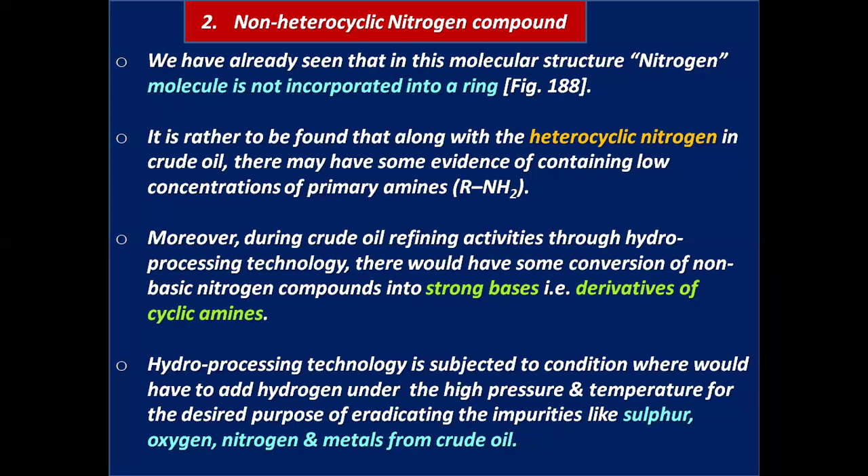Hydroprocessing technology is applied where the oil is first heated in a furnace and then combined with hydrogen, passing through a reactor loaded with a suitable metal oxide catalyst such as cobalt and molybdenum oxides or alumina. This process, also termed hydrocracking, is the most usual practice of removing many contaminants as follows.

First, through the hydrogenation reaction, two hydrogen atoms combine with sulfur, forming hydrogen sulfide, that is H2S.

Second, nitrogen compounds are converted to ammonia, NH3. Number 3, organic or inorganic metals contained in oil are deposited on the catalytic bed.

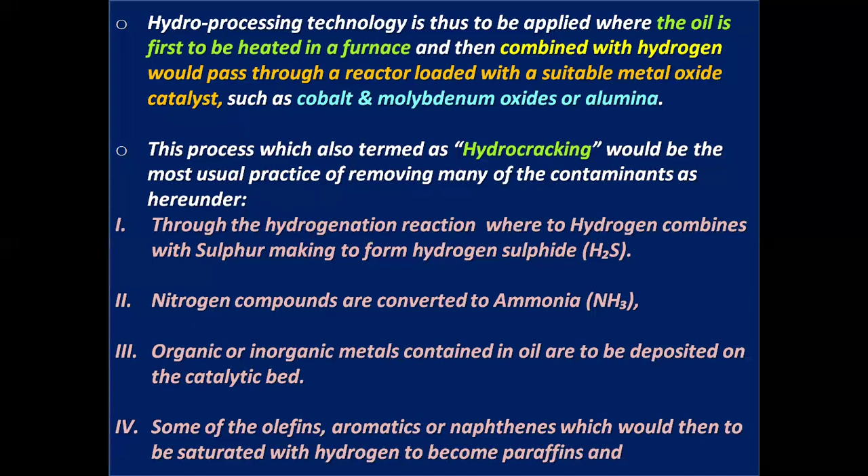Number 4, some of the olefins, aromatics or naphthenes would then be saturated with hydrogen to become paraffins. And

number 5, thermal and catalytic cracking of crude oil would also take place under controlled high pressure and temperature, by which heavy hydrocarbon molecules are broken up into lighter molecules, creating gases such as methane CH4, ethane C2H6, propane C3H8, propylene C3H6, butane C4H10, and butylene or butene C4H8.

If the sulfur content is found to be high, then for maximum removal of sulfur, it requires carrying out the process with higher temperatures and pressures.

Indeed, it can be concluded that the most serious contaminants in crude oil would be the basic nitrogen compounds. Crude oils, as extracted from under the ground or under the oceans, are really of little use in their raw state, but their actual value lies in the products created from them.

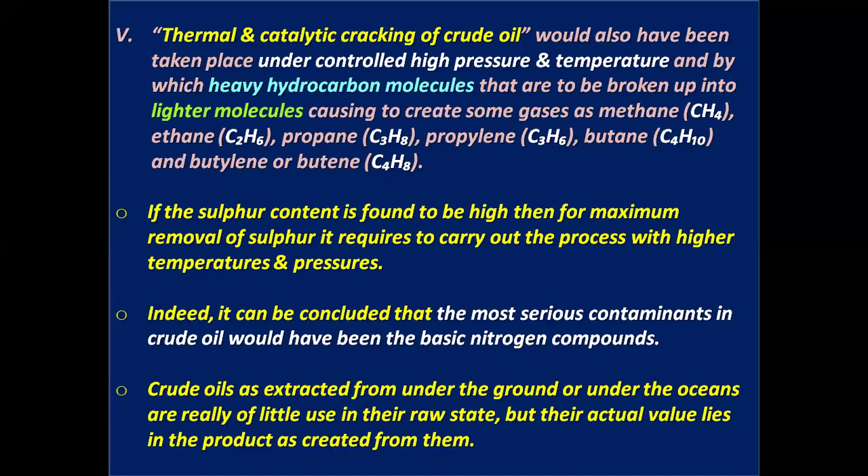It is also worth mentioning that the composition as well as content of impurities in crude oil would vary from oil field to oil field.

In the refinery, an organized and coordinated arrangement of manufacturing processes is designed to produce physical and chemical changes in crude oil to convert it into useful products like transformer oil, lubricating oil, fuel oil, bitumen, etc.

There is rather a recommendation that crude oils containing nitrogen compounds greater than 0.25 weight percentage must need to have a nitrogen removal treatment in refineries. If it is greater than 0.25 weight percentage, then it must need to have a nitrogen removal treatment in refineries.

In ASTM D5762 standard, analytical techniques are provided for the detection and determination of organically bound nitrogen compounds present in crude oil fractions.

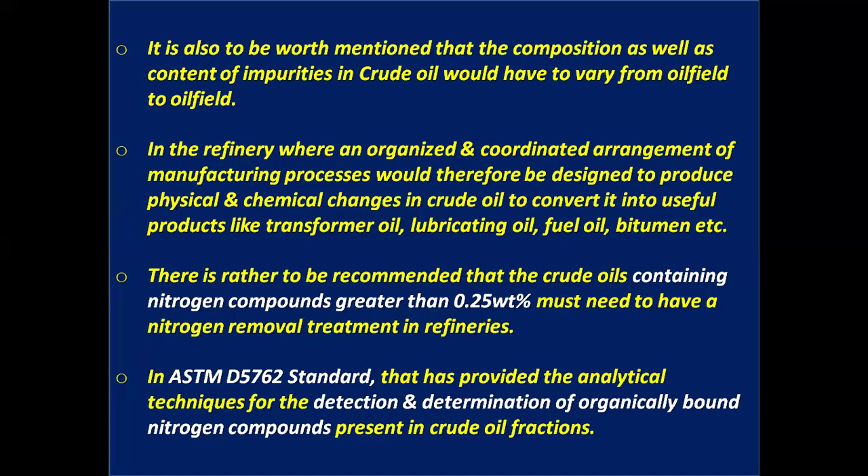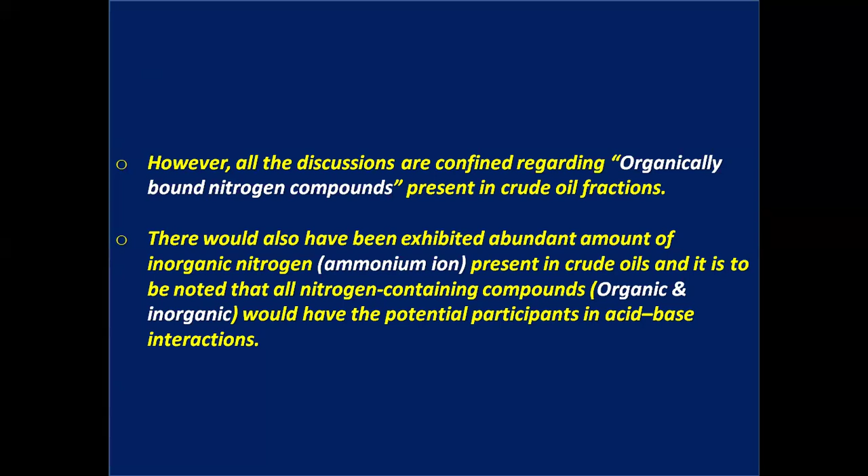However, all the discussions are confined regarding organically bound nitrogen compounds present in crude oil fractions. There is also an abundant amount of inorganic nitrogen ammonium ion present in crude oils, and it is to be noted that all nitrogen containing compounds, organic and inorganic, have the potential to participate in acid-base interactions.

Total acid number, that is TAN value. The acidity of crude oils can be distinguished by their respective acid number or TAN value. A measurement of acidity or TAN value is one of the most indicative quality measurements of crude oil, which can be determined by the amount of potassium hydroxide, KOH, in milligrams that is needed to neutralize total acids in 1 gram of oil.

To meet the gap between extensive demand and consumption, there is a present trend of exploring and utilizing heavy as well as inferior types of crude oil, that is, high acidic crude oil.

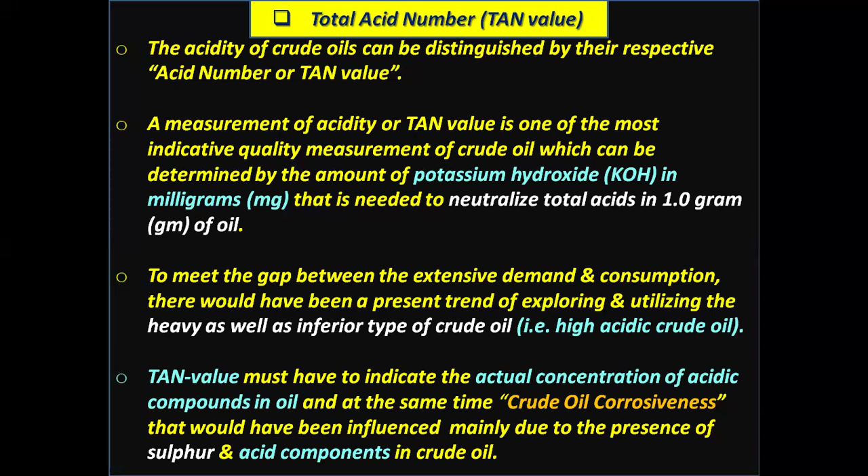TAN value indicates the actual concentration of acidic compounds in oil, and at the same time crude oil corrosiveness is influenced mainly due to the presence of sulfur and acid components in crude oil. The quality of crude oils is therefore better judged by their elevated sulfur content and quantum of acidity.

Acidity in crude oil can be classified by the underneath TAN value. TAN value less than 0.5 milligram KOH per gram is considered conventional crude oil. From 0.5 to 1 milligram KOH per gram is considered acidic crude oil, and greater than 1 milligram KOH per gram is considered high acidity crude oil.

Usually, high acidity crude oil has the following characteristics: high acid value, lesser content of light components, high density and viscosity, high gel asphalt content, high salts and heavy metals content, and highly corrosive in nature.

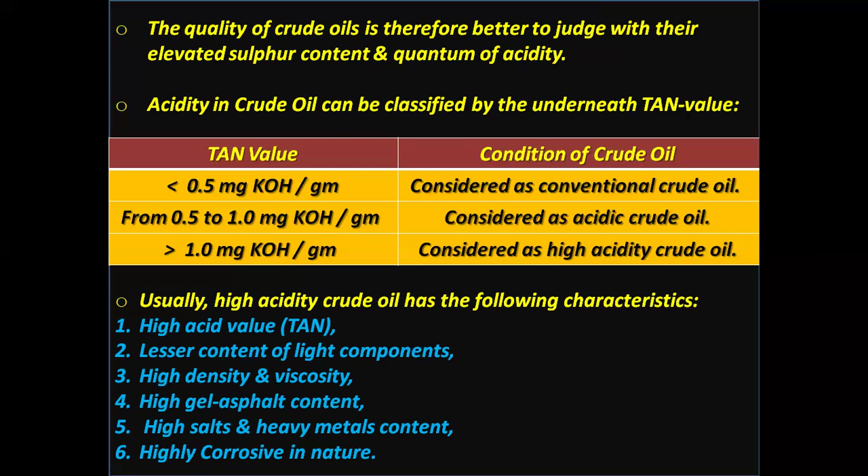The acidic components in crude oil, including naphthenic acid, fatty acid, aromatic acid, phenol, thiol, etc., are usually called petroleum acids. Though the content of petroleum acids in crude oil may be significantly low in percentage weight, these acids may still induce serious corrosive effects.

Naphthenic acids occur naturally in crude oils, and their presence among petroleum acids is usually of the order of more than 85%.

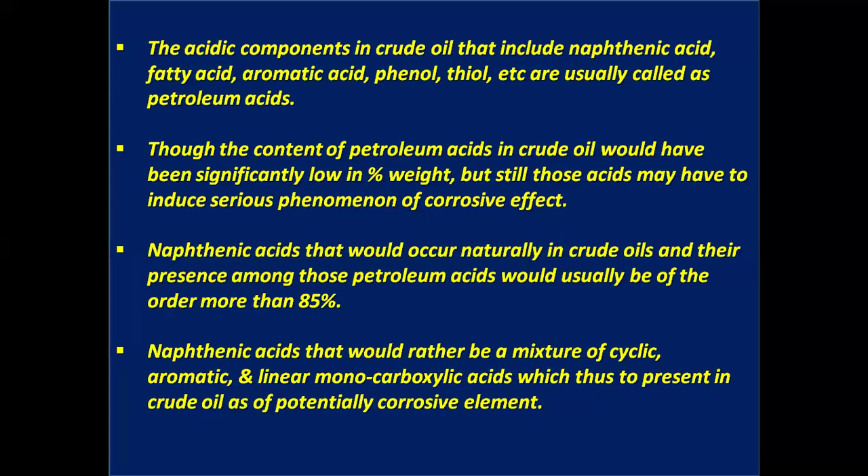Naphthenic acids are rather a mixture of cyclic, aromatic and linear monocarboxylic acids, which thus present in crude oil as a potentially corrosive element.

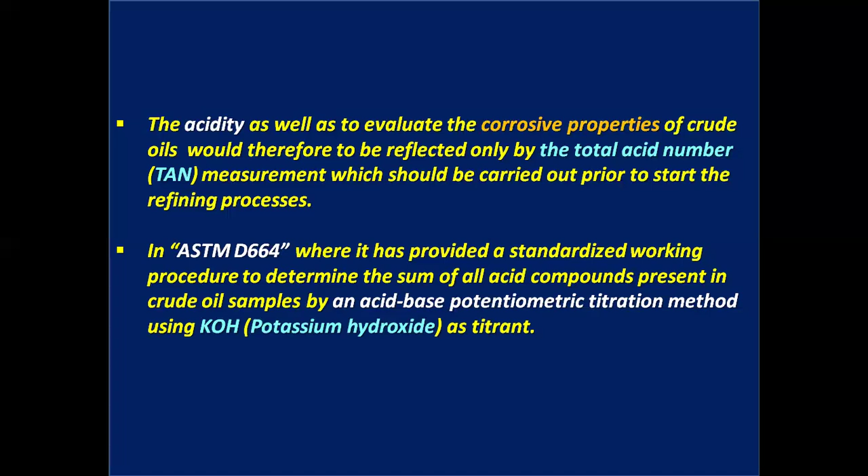The acidity as well as the corrosive properties of crude oil should therefore be reflected only by the total acid number measurement, which should be carried out prior to starting the refining processes. ASTM D664 provides a standardized working procedure to determine the sum of all acid compounds present in crude oil samples by an acid-base potentiometric titration method using KOH, that is potassium hydroxide, as titrant.

Key parameters to evaluate quality of transformer oil: selection of transformer oil is to be determined based on the special characteristics of insulation for transformer as well as to fulfill the additional task of heat transfer and cooling.

So, the oil must have properties which include high voltage dielectric strength, high dielectric constant, low power factor, high chemical stability, low viscosity, low pour point, low volatility, high thermal conductivity, and aniline point.

Oil must always offer neutral behavior with all sorts of insulating materials as well as internal system components. The high performing transformer oil must be non-corrosive in nature with very low sulfur level.

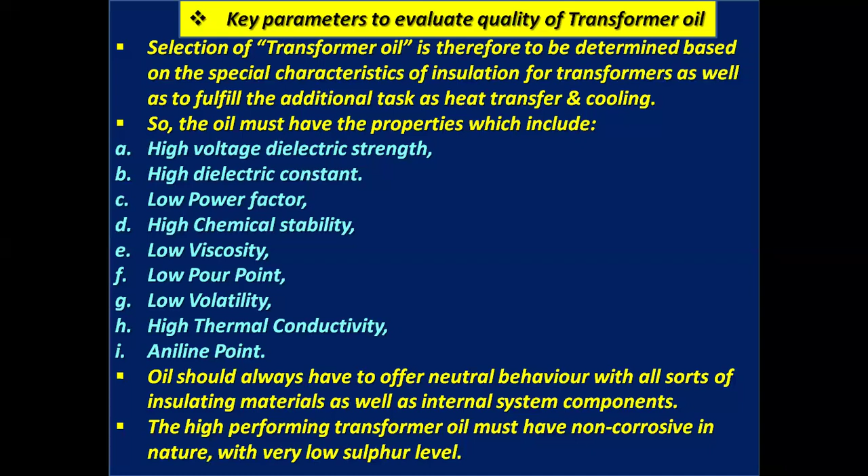Presence of significant level of corrosive sulfur compounds in the oil may lead to reactions with system components such as transformer coils, that is copper, causing electrical and thermal damage.

Exhibiting the complexity and extent of the problem, it has been recommended that transformer oil should satisfy the oil or copper interaction tests as prescribed in ASTM D1275B.

Viscosity is one of the most important qualities of liquid oil, which plays an essential role in referring to the oil's resistance to flow. It is important to understand that the lower the viscosity, the higher the circulation speed of the oil, which equates to a higher quantity of heat being dissipated.

Standards IEC 60296 and ASTM D3487 have precisely recommended an upper limit for viscosity of insulating oils, which is 12 millimeters square per second at 40 degrees centigrade.

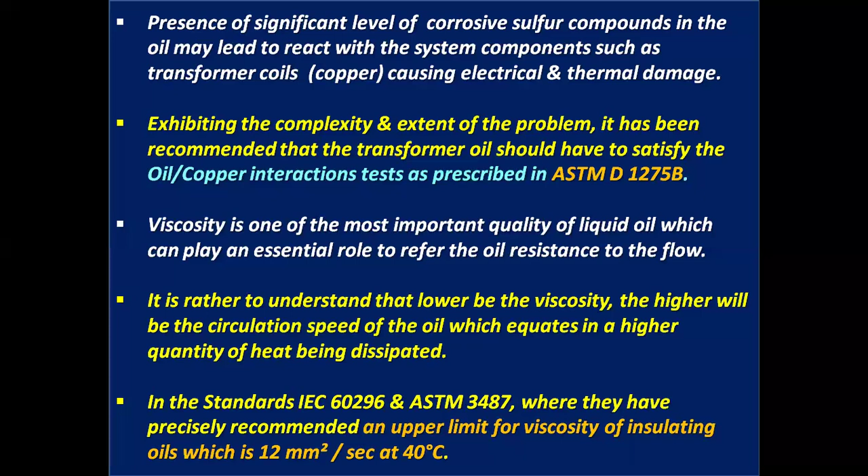Flash point is one of the most important criteria for selection of transformer oil, as it indicates the lowest temperature at which a liquid gives off vapor to form an ignitable mixture in air near the surface of the liquid. Therefore, the liquid flash point is the lowest temperature that can cause a fire. So, the lower the flash point, the greater the risk of fire.

For good mineral based transformer oil, the flash point should be as high as 140 degrees centigrade. However, the flash point of a flammable liquid would also vary with its concentration. There is an exponential relationship between temperature, concentration and viscosity of the liquid oil.

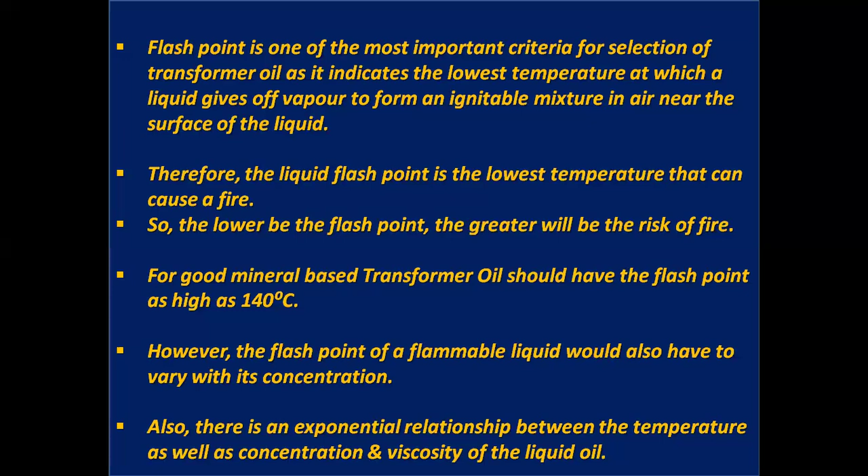Viscosity of high performing unused transformer oils is normally in the range of 7 to 8 millimeters square per second at 40 degrees centigrade. And according to the standards, even with such low viscosity, their flash point must never be lower than 135 degrees centigrade.

The mode of application as well as environmental conditions are both vital deciding factors to select the type of transformer oil to be used, whether naphthenic based or paraffinic based transformer oil.

Paraffinic based transformer oil, whose pour point is comparatively higher, is still the most preferred choice to use in hot environmental conditions, as it is cheaper than naphthenic based oil.

Naphthenic based transformer oil, being more or less wax free, has a good flowing feature under low temperature in cold climatic conditions.

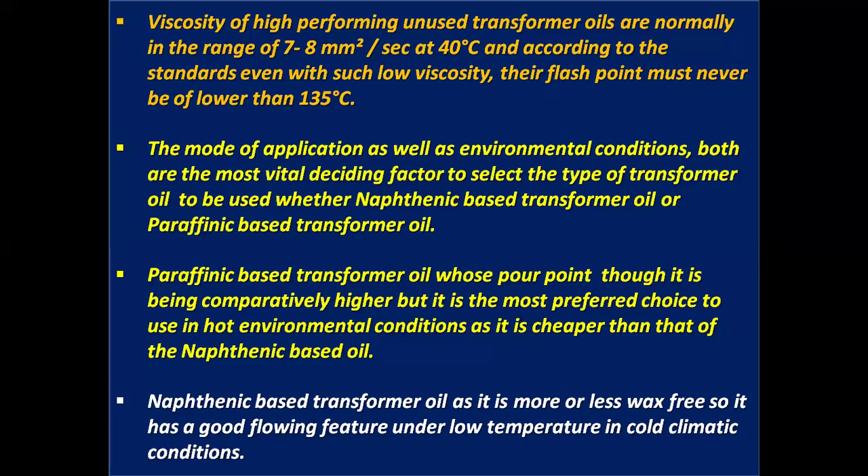Solvency refers to the ability or potentiality of a base oil to dissolve another chemical species at the molecular level, which may be an additive component or a contaminant such as water or an oxidative product, that is, sludge, as produced.

The aniline point is most often used for characterization of hydrocarbon based oils by estimating the percentage rate of solvency of aromatic hydrocarbon content in the base oil. That is why aniline point is most important.

ASTM D611-2023 provides the standard test method for quantifying base oil solvency as well as measuring the aniline point and mixed aniline point of petroleum products and hydrocarbon solvents.

It is quite evident that aromatic hydrocarbons exhibit the lowest values of aniline point, whereas paraffin based oils have the highest value.

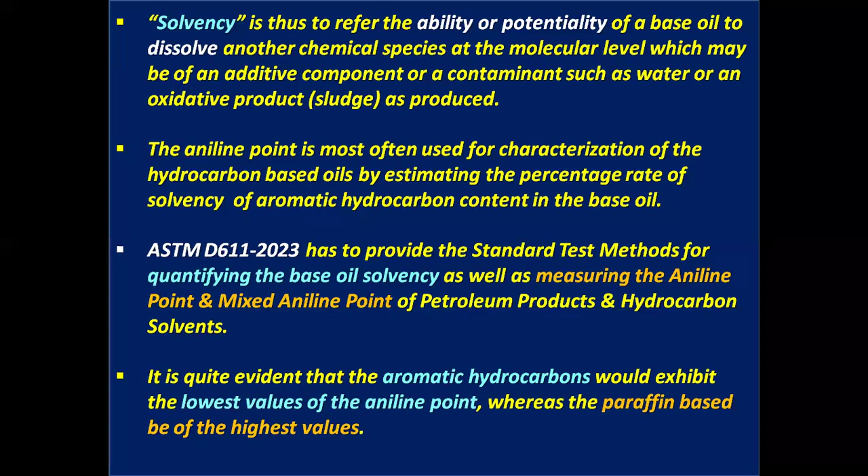The oxidation rate is another important parameter to consider during the selection of transformer oil. Naphthenic based transformer oil is easier to oxidize, and its oxidation rate is much higher than that of paraffinic based oil.

But as the aniline point of naphthenic based transformer oil is much lower than that of paraffinic based oil, the naphthenic based oil has the property of high solvency.

Basic importance of determining the aniline point of oil. Aniline point, or aniline point temperature, can be referred to as the minimum temperature at which the solubility of aniline in oil, or oil in aniline, reaches 50 volume percentage. In other words, it can be expressed as the lowest temperature at which equal volumes of aniline and oil are completely in a miscible state.

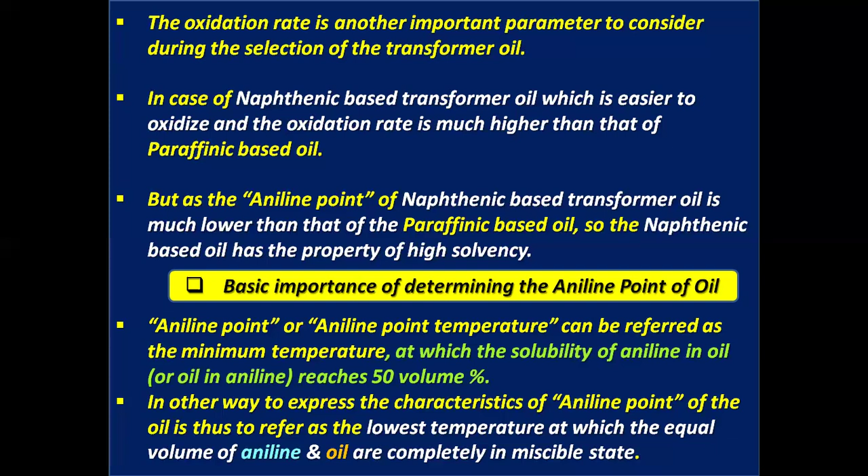Aniline is an aromatic compound with the formula C6H5NH2. Aniline point of an oil would indicate a rough estimation of the relative content of aromatic compounds present in the oil.

From the analysis, it has been concluded that the oil with higher aromatic content would have a lower aniline point, and vice versa.

Aniline point is also to be justified as a measure of oil solubility, where the lower the aniline point of an oil, the higher its solubility criteria relative to aromatic compounds, and vice versa.

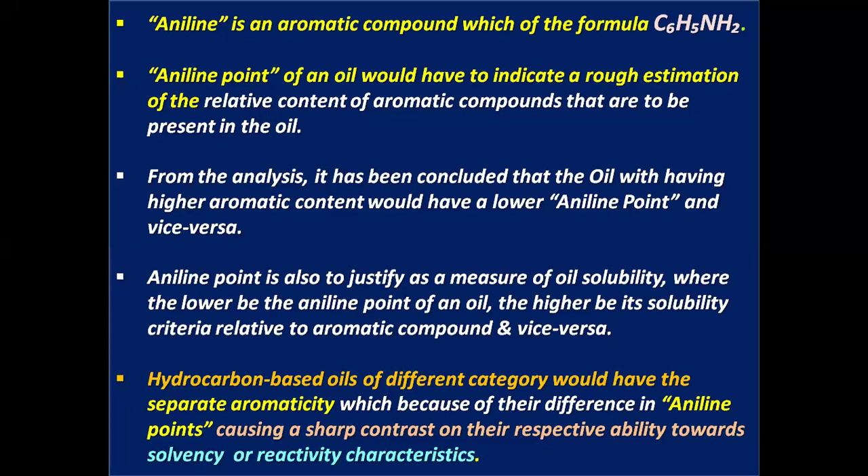Hydrocarbon based oils of different categories would have separate aromaticity, which, because of their difference in aniline points, causes a sharp contrast in their respective ability towards solvency or reactivity characteristics.

Naphthenic crude oil reserves account for only 2 to 3% of global crude oil reserves. So there is high strategic significance in the production of low flashpoint transformer oil and aviation fuel.

Normal naphthenic crude oil contains more than 50% of saturated hydrocarbons along with more than 40% naphthene content. As naphthenic based oils contain mainly naphthenic compounds, higher than paraffin contents and aromatic hydrocarbons, their aniline points lie in between the values of paraffins and aromatics.

However, it is to be noted that the aniline point is a property that indicates the solubility of a base oil. According to the definition, aniline point is the lowest temperature at which the base oil is completely miscible with an equal volume of aniline, that is C6H5NH2.

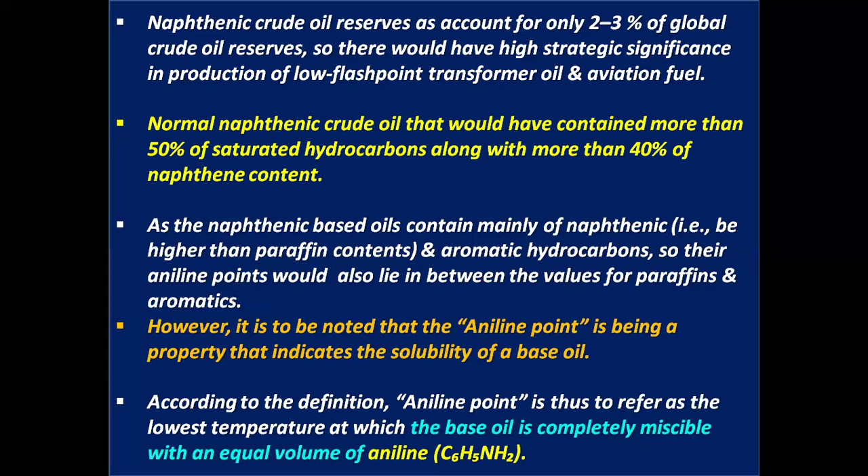The paraffinic base oil would have an aniline point of approximately 100 degrees centigrade or greater, whereas naphthenic or aromatic base oils have a low aniline point, less than 100 degrees centigrade. So they have better solubility than the paraffinic base oil.

It is to be noted that the viscous fractions of the base oil composition and solubility would somehow be characterized by its viscosity gravity constant. However, viscous fractions of base composition would be a combination of its specific gravity and kinematic viscosity.

The specific gravity, or relative gravity, is a dimensionless quantity defined as the ratio of the density of the base oil to the density of water at a specified temperature.

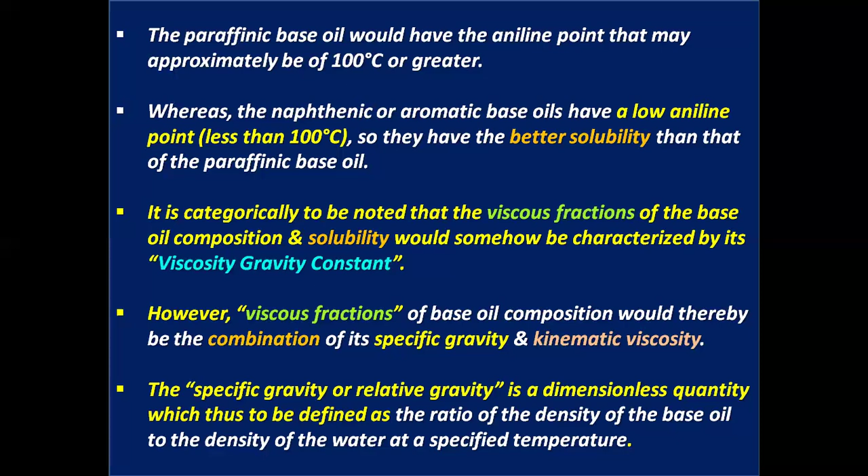Basically, kinematic viscosity of oil has a direct relation with its specific gravity, and that would be indicated by its resistance to flow and shear stress due to gravity.

According to ASTM D2501, the viscosity gravity constant would be calculated from the determination of specific gravity at 15.56 degrees centigrade, that is 60 degrees Fahrenheit, and from kinematic viscosity at 37.78 degrees centigrade, that is 100 degrees Fahrenheit, of the oil.

Conclusive part. High paraffinic hydrocarbon based oils have higher aniline points, which indicate low levels of aromaticity and are supposed to have poor solvency or reactivity characteristics.

In contrast to paraffinic based oils, naphthenic based oils are distinguished by their lower value of aniline points and thus behave differently than paraffinic oils. Naphthenic based oils have higher solvency or reactivity characteristics with lower pour points.

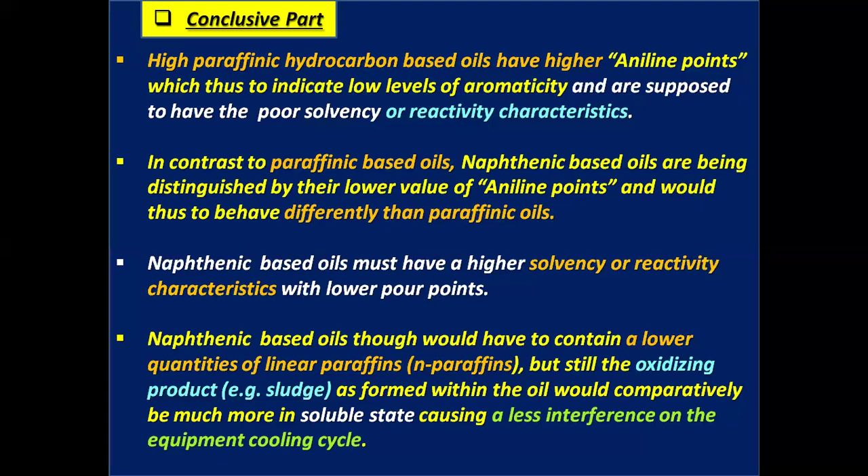Naphthenic based oils contain lower quantities of linear paraffins, that is N-paraffins, but still the oxidizing product, that is formation of sludge within the oil, would comparatively be much more in a soluble state, causing less interference on the equipment cooling cycle.

Viscosity gravity constant may refer to a useful function for framing out an approximate characterization of the viscous fractions prevailing within the hydrocarbon based oil.

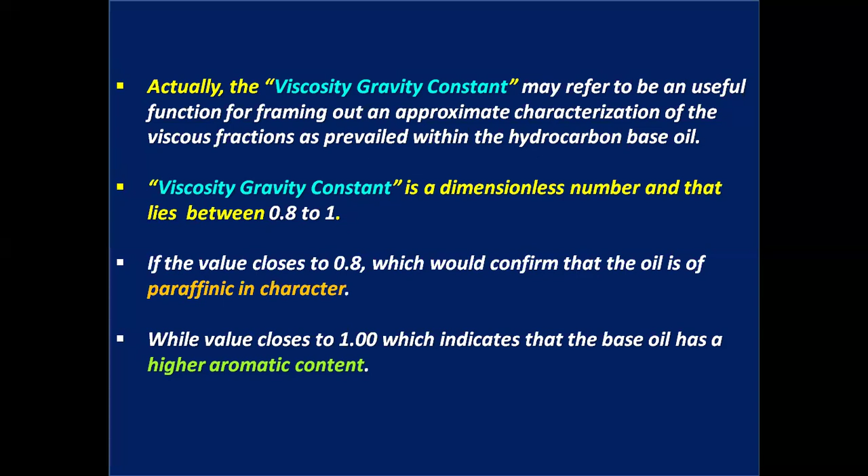Viscosity gravity constant is a dimensionless number that lies between 0.8 to 1. If the value is close to 0.8, it confirms that the oil is paraffinic in character, while a value closest to 1 indicates that the base oil has a higher aromatic content.

Let's stop here. Further to be continued at a later stage.